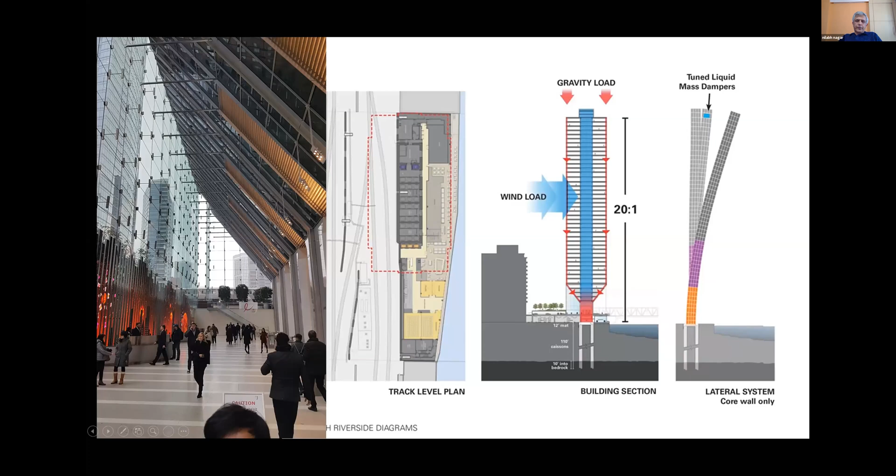What have been the learnings? Having visited almost 65 cities in the last 20-25 years that I have been traveling, one must dream and it will happen. There is nothing which you can't do. You can build escalators at the 40th floor, at the 70th floor, you can build atriums on the 20th floor or on the 40th floor, things like that.

But you must always respect the neighborhood, but you can create your own context. You must always have an attention to detail. You must have a clear circulation and segregation. And you should always create an awe and wonder. Spatial volumes are very important at public spaces. The height, the volume, the space, the width is very, very critical. Impeccable finishes is something which I've learned over all the time that we have built and we have seen.

The other thing which we must always remember is to create a robust program. It doesn't always have to be an office building. It doesn't always have to be a residential building. There has to be an element wherein you must be able to program the building in such a way that it stays in the long term.

So what are the key points for high-rise? The most important is the purpose and context. What is it that you're building it for? Then there is geometry and proportion, because after all, any high-rise requires structure, and it requires it to be stable and do the purpose it's meant for.

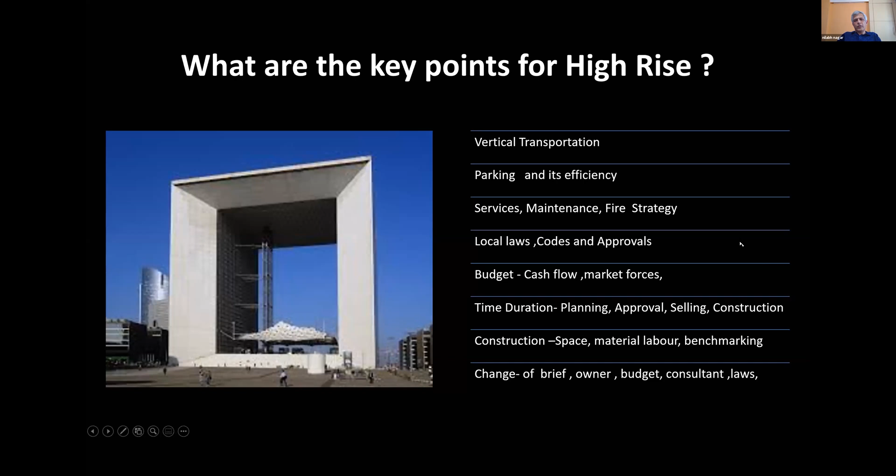Construction: there is always a space limitation in Bombay, or the material, labor, and of course there's the idea of benchmarking, samples and sample apartments and everything else which comes into that. And the scariest part of this whole high-rise building is the change. The change of brief, sometimes ownerships change, budgets change, consultants change, laws change. And it's something which we have to deal with every day, and we have to react to it as we go along. Now let me share with you some of the projects, and we'll discuss some of these points which I have said.

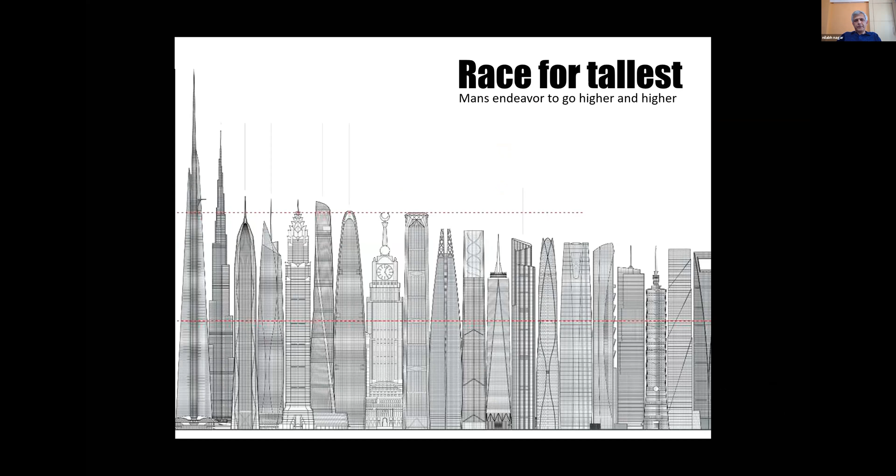In the world, there has always been a race for the tallest. This is man's endeavor to go higher and higher. And we, as one of the leading architecture firms in the country, are not far behind. We have also dreamt and we have built. It started with the Tower of Babel. Then we had the more iconic Empire State Building. Then we had the Sears Tower, the Petronas Towers, the Taipei Tower, and finally the Burj. And now I believe there are further towers coming up which are taller than this. Calatrava is building one which is taller. There's one more happening in Saudi which is taller. And there are equally tall buildings already planned in 2019, and I believe coming up in 2021 as well.

So in our journey for tall, we built the Imperial 1 and 2, which is 255 meters. Then we built the 23 Marina at Dubai, which is 400 meters. And then we were also planning the India Tower, which is 515 meters, in the Chowpatty area. The work started, they dug below. They had a 9-meter raft already dug. And then of course the project stopped because of the recession and everything else.

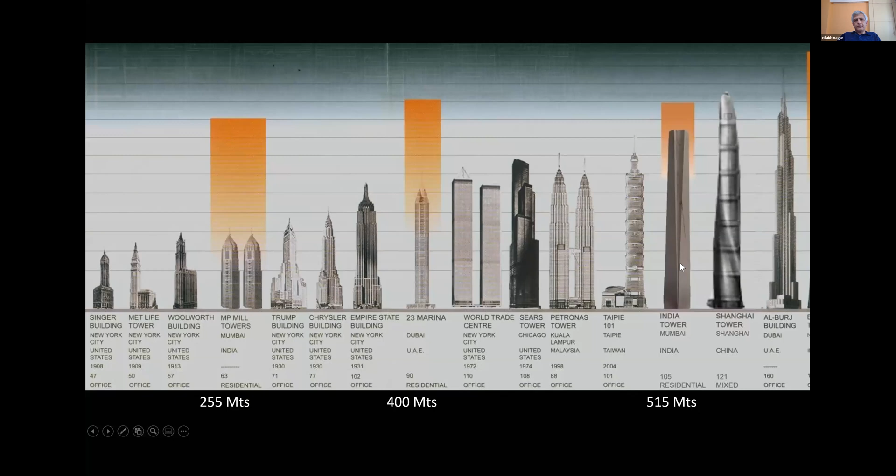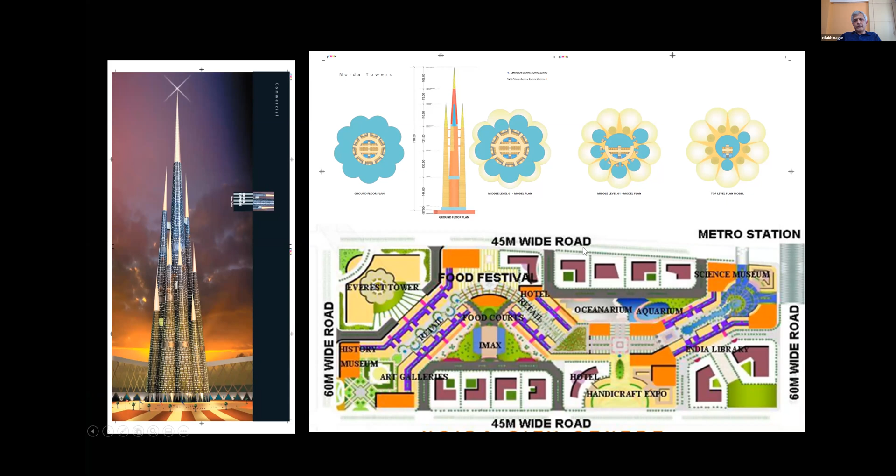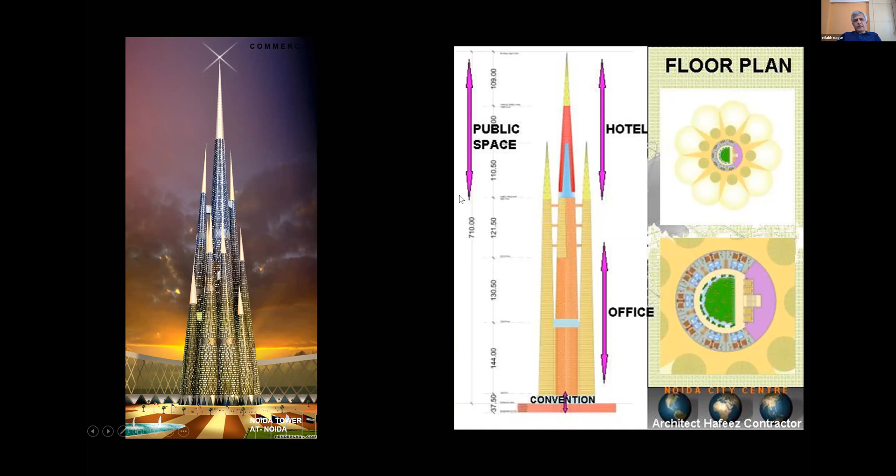But meanwhile, while we were planning this, we had an opportunity from the government of Uttar Pradesh, where Mayawati asked us to plan the tallest building in Noida. So they gave us a plot in Sector 32, Noida. This was one of our schemes which we quickly came up with, called Everest Tower at that time. The idea was to have one of the tallest, of course. At that time, we were trying to beat the Burj, which was at 560 meters. So we designed this building at 710 meters height. And we created a Mall of India below that, over 32 acres of site, with office buildings, residential, hotels, and mixed use on the top, super apartments and everything else. So this was one of those quick exercises to pamper the ego of the state at that time.

So we now come down to what we have actually built: the 23 Marina at Dubai. This, for a short period of time, for a year or so, was one of the tallest residential buildings in the world, being a pure residential building. Then of course we got beaten by an adjoining neighbor in Dubai itself, and subsequently in other parts of the world. While it lasted, it also came in the I Love Dubai official postcards of Dubai Tourism, because at that point of time, it was the tallest residential building in the world.

This building is part of the Marina complex, which is a kind of mixed use complex where they have towers along the artificial marina that they have created. And our site was on the rightmost corner, facing the Palm Jumeirah and things like that. This was the site, this was the view when we first came into the site.

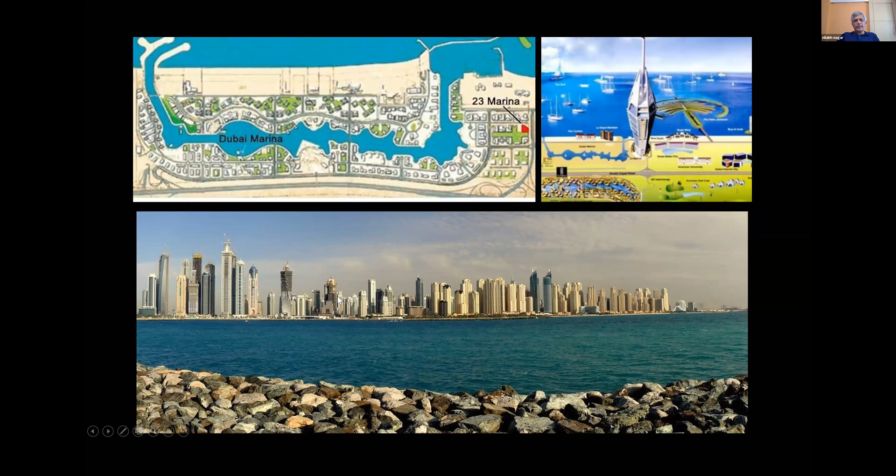And these are some of the first sketches that Hafeez drew. He loves to draw on newspaper simply because some of those ideas do come on the plane when it's the quietest. And then it gets followed up by sketches once he is in office and discussions with the clients and that passionate person.

And then this was the first time that we were building higher than 60, 70 floors. So we had international consultants, Mr. Joe Colaco, who came in from Texas, and he advised us on the way the structure was to be done, the way the structure behaved in a tall building like this.

And then there were the local laws of Dubai, which required a certain amount of parking. The zoning criteria defined that the building had to build right till the edge of the plot, because there is a parking bay at the back. That's how the whole structure of Marina is an urban design defined complex space.

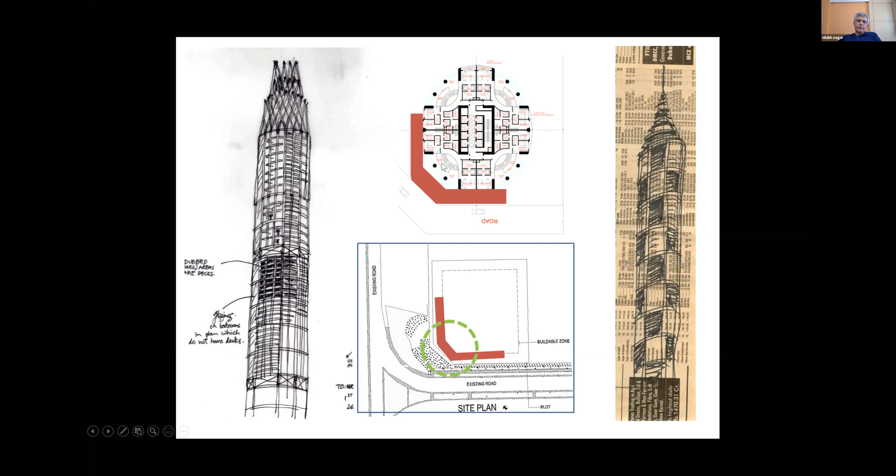So let's run through the floor plans of this building. This building is divided primarily into 3 zones with 2 service floors, which of course have the outriggers also. Up to the 8th floor, the podium is all the public space. So you've got the club, the entrance lobby, the services, the parking. All of that happened till the first 8 floors. And subsequently, we have a large triple height public club space above the podium.

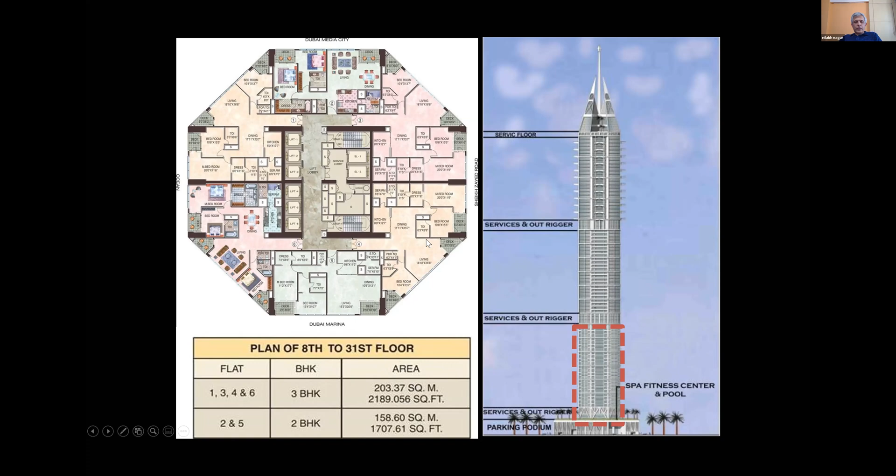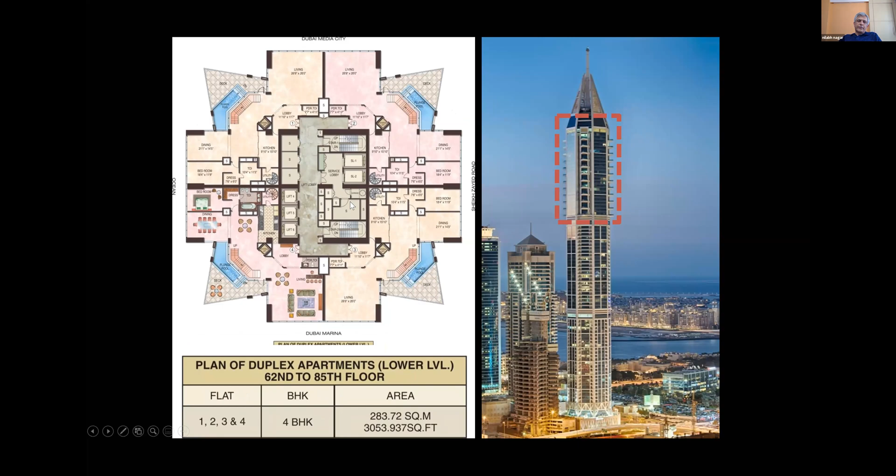And then we have the 3 zones that I spoke about. One has 6 flats a floor from the 8th to 31st. Then we have 35th to 58th floor, which is 4 flats a floor. And then they have some terraces coming in. And then on the top, we have the duplex apartments, which have their own individual private lifts with corner decks. There are double height lobbies in every duplex apartment. So overall, about 350 apartments.

Hold on a minute, there's a slight change in the...

In the Bombay Dyeing Mills, we have a mixed use development, which has 3 towers of residential, 1 tower of office, 1 tower of hotel, and all of it is combined with ground level retail happening down below.

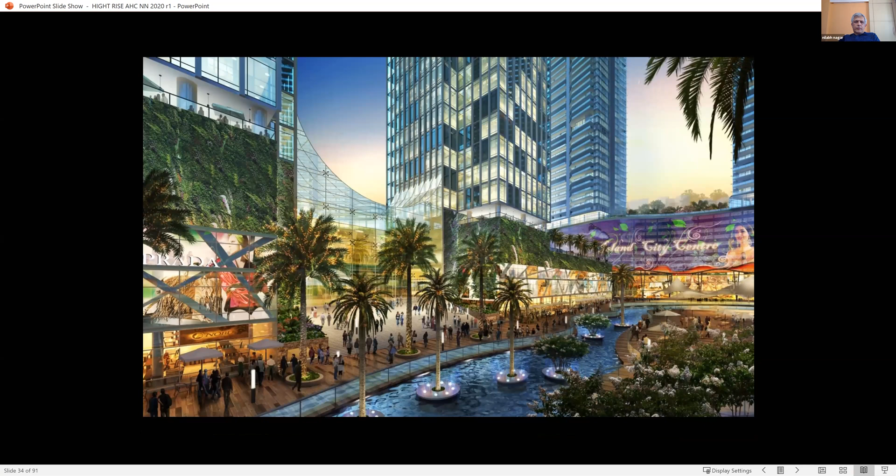Yeah. So what I was trying to explain was that when this planning was happening, some of the critical parts that I wanted to share with all of you was the fact that given the same footprint area of a building, and the client's requirement for certain types of apartments, the proportion of 3 bedrooms, 4 bedrooms, 2 bedrooms, initially we had come up with plans which are linear shapes, which gave us a much better elevation and shape and form.

But when it comes down to efficiency of floor plate to core area, efficiency of parking, efficiency of the structure itself, we realized that a geometrically straight square building is the best option in terms of structural efficiency. Because of the geometry, we could bring down the consumption of steel. The slenderness ratios of the building improved considerably, the efficiency of the structure improved, and we could make the building in a much more economical way.

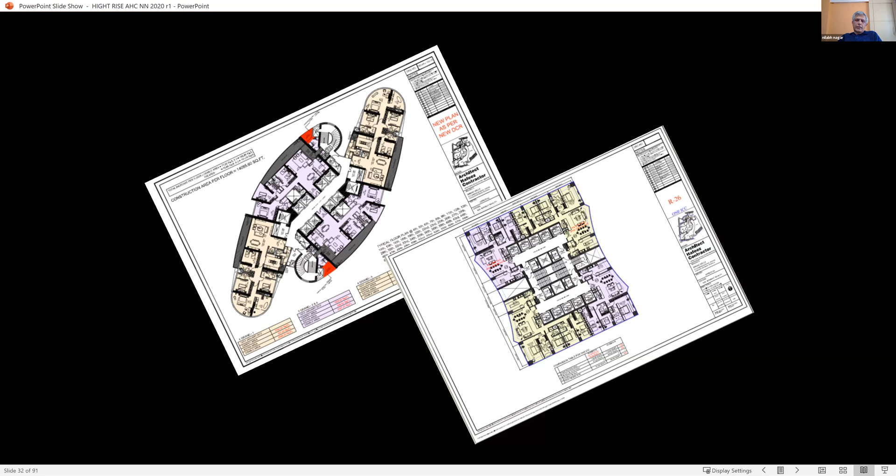The next I want to show you is the Imperial 1 and 2, which again became the tallest building in India for quite some time. And now we have higher buildings in Bombay itself and in Calcutta also.

This I will explain to you in a different manner, in the sense that this also served a larger social issue, which is slum rehabilitation, an important aspect because in Bombay more than 40% of people live in slums, probably more. I really don't have the real figures, but this particular project was a long time in the making. It took us quite some time.

First, when we were at the site, it was full of slums. This part of the project is on the hill slope. This part is on almost flattish ground, and the entire thing from here all the way up was completely full of slums. So this way I find that the high rise itself has an ability to overcome a social, or let's say a crowding issue of the slums.

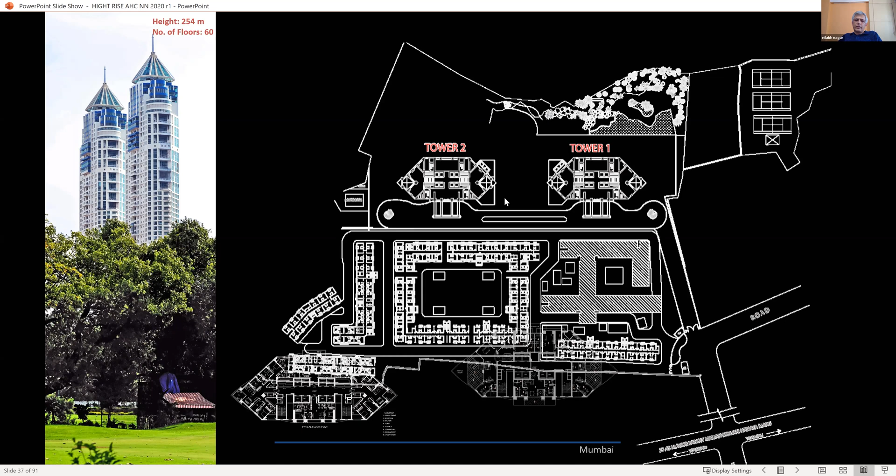This has also got about 6 flats a floor, and on the top it becomes a duplex, and then the topmost floor is a triplex for the owners. So we got a set of 8 lifts, 2 zones running. I think the speed of the lift was 4 meters per second.

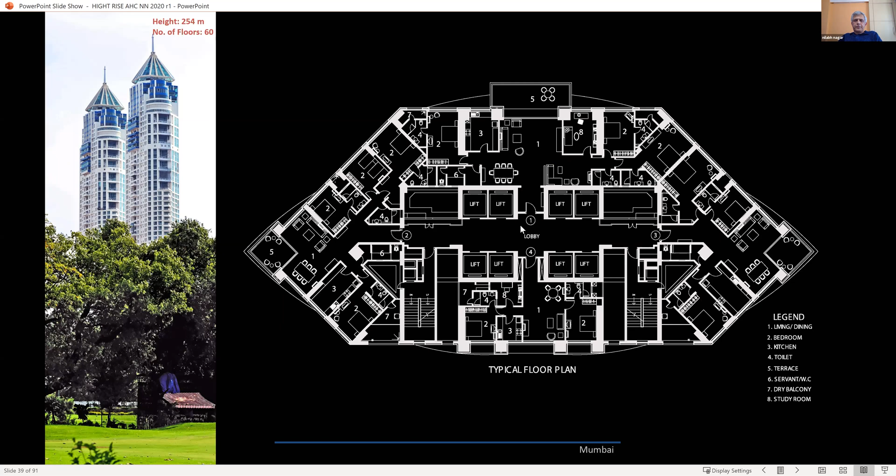So this is what I was explaining to you. This is how it was when it first came in, 2,500 slum units, all across and going all the way up the hill. And over a period of time, we made the rehab buildings, and then we started the towers.

The other thing you must understand about these towers is that this required that a fire tender has to go right up till the top of the 9-floor podium. So then you had to have a kind of a double height driveway which went all the way here, then it came up, then again a double height driveway which went all the way up. So at any given point of time, you had a 6-meter driveway going right till the top of the podium.

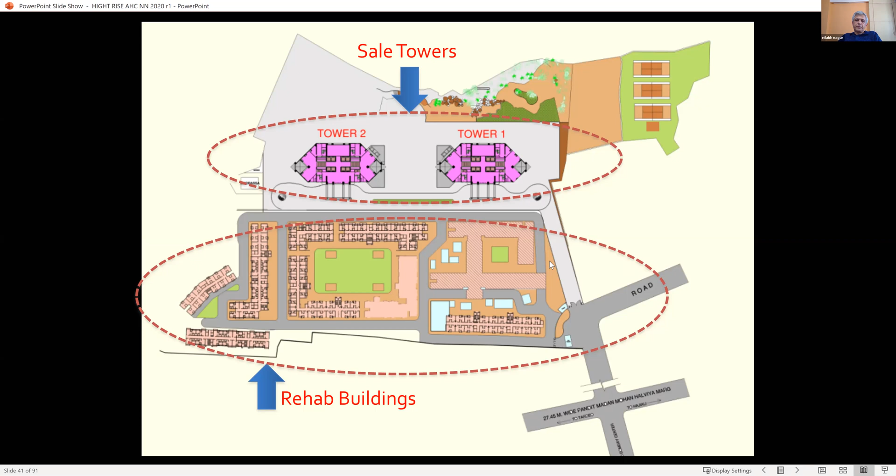This is how it was. We built the first set of buildings, then we started the tower at the same time. And then we built these 2 towers on the top. So you can see the slum rehabilitation buildings here. You can see the podium, 9 floors of podium here. And then you have these towers coming on the top. This is the Ambani residence.

Here the external cladding we have used is aluminum composite panels, and we had, of course, initial challenges. The wind forces were quite high. Both the building as well as the curtain wall were tested in wind tunnel testing, and we realized that this building, considering its geometry and everything else, had very high performance requirements. This was done by a Swiss company, Schmidlin, at that time.

The railings had to be designed for that kind of a wind force. Railing heights had to be decided based on the wind. And so were the sliding window systems and everything else that came along with it.

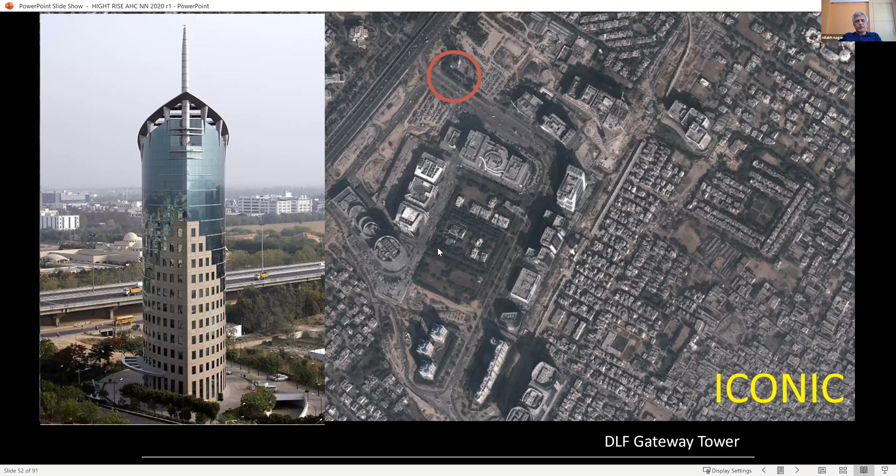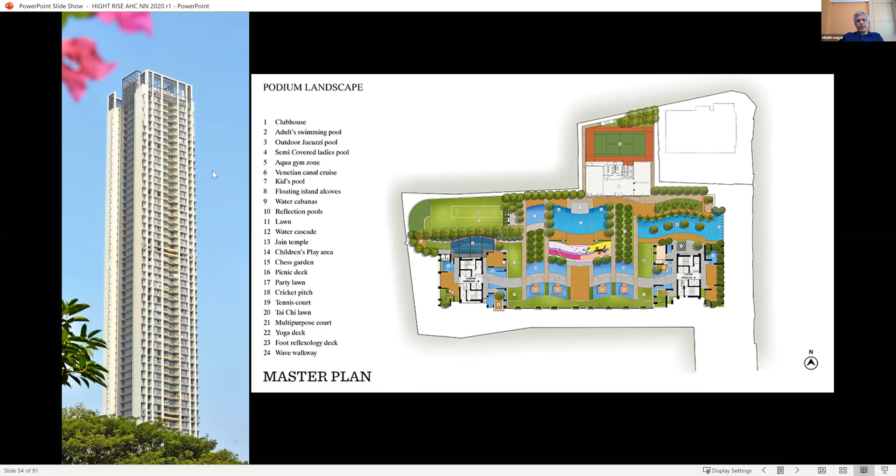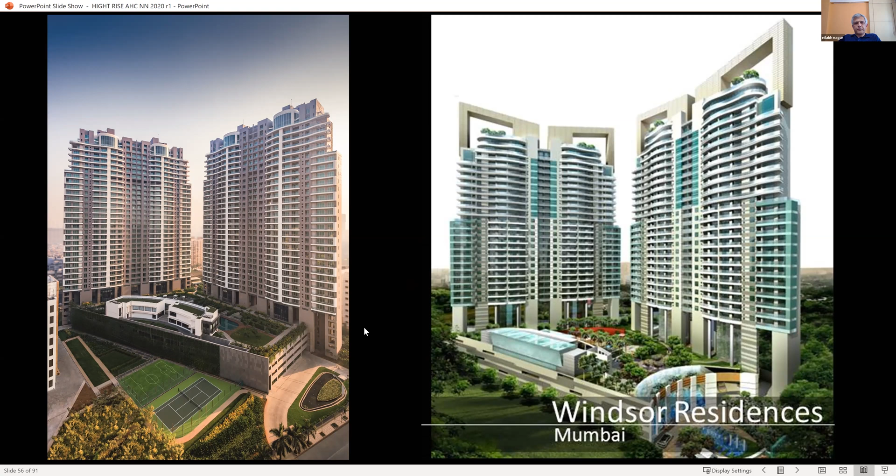So that went off. And here also you can see the second aspect, especially for people outside Bombay, is the fact that we have 3 levels of car parking. And then we always make sure that we have a triple height lobby at the level at which you come out into the main garden. So lobby heights have always been our hallmark, or something which you must make sure of, because that's what gives you the first impression, both when you're entering the building and when you're exiting the building. This is a triple height lobby.

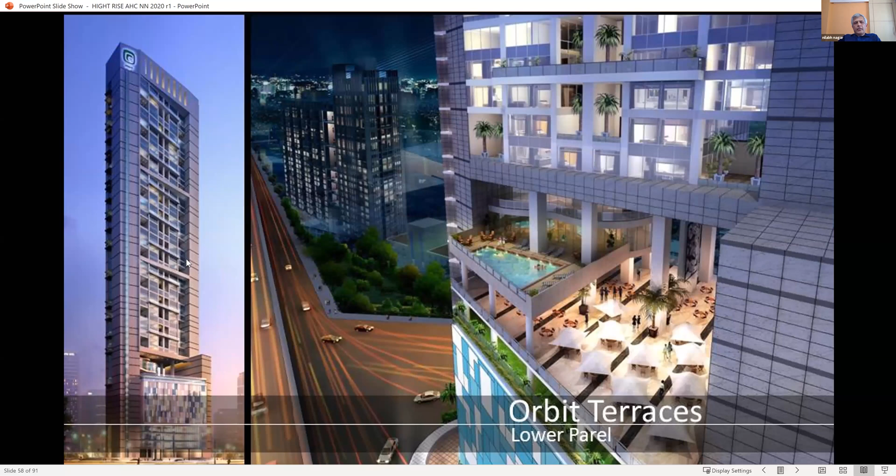I was trying to show you this project because this building was originally conceived as an office building. And then subsequently, the office building market wasn't so good. So we had to convert this building into a residential building. I think the building had come up to about 1/3 the height, and then subsequently it was completed with residential floors. That created large gardens at the terrace level of the parking floors. This has got a mechanical car lift system.

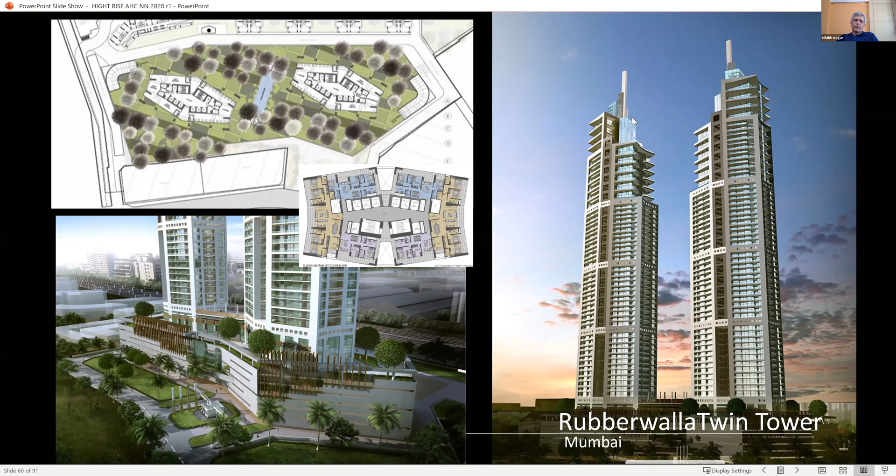This is a project which is underway right now at Sewri, very close to the Bombay Port Trust. It has got excellent views to the eastern waterfront. And this is also one of the slum rehabilitation schemes where you can see those rehabilitation buildings at the back, and the sale towers will come up in the front. 9 levels of parking and 52 levels after this. Again, the structure: there is a strong core, there are perimeter columns, and then you will have outriggers at every 3 levels, which will connect the inner core to the outer skin. And then on the upper levels, we created duplexes on one side of the tower. And then really on the top, there were a couple of triplexes as well.

This is also a project which is currently on hold, but very much going through this process of approvals. It starts off like 6 flats a floor, then goes on to become 4 flats, then becomes a duplex, then becomes a triplex.

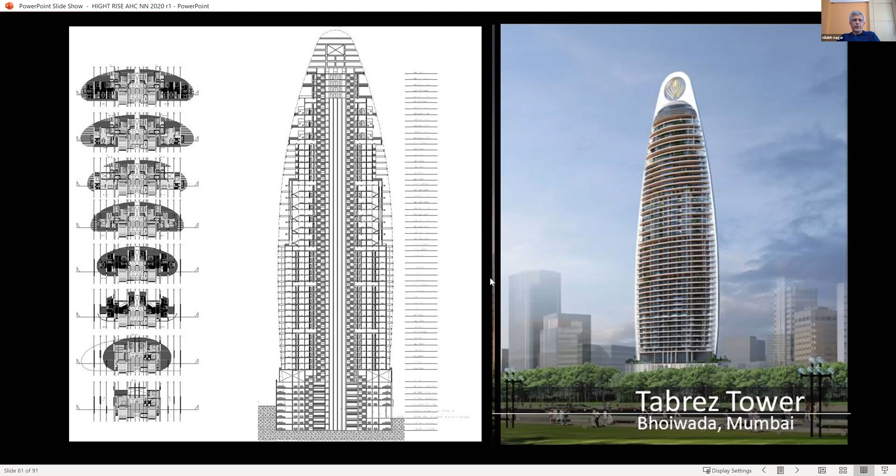This project is almost nearing completion. This is next to the race course in Bombay. One of the greatest challenges that this project has had was the time duration. This is also a slum redevelopment project. After a builder has already built and spent money on the slum redevelopment, he starts off on making the tower, and then the sales kind of diminish and the laws change.

So what happened was that till this level, till kind of, I think the 30th level, it followed the old plan, and then the laws changed wherein they didn't allow these decks on the outside to be free of FSI, and all had to be enclosed. Everything with the decks which used to get free of FSI were not there anymore. So one had to include that into the building and then change the building floor plan subsequent to that on the top. So you can see the building which is curved down below and it's become straight on the top.

This is something which is a reality here in Bombay. We had to face a fair amount of this change of laws in the last 4 years that has caused its own disruption, and we had to react fast to ensure that the project doesn't stall, neither the developer faces any issues on that.

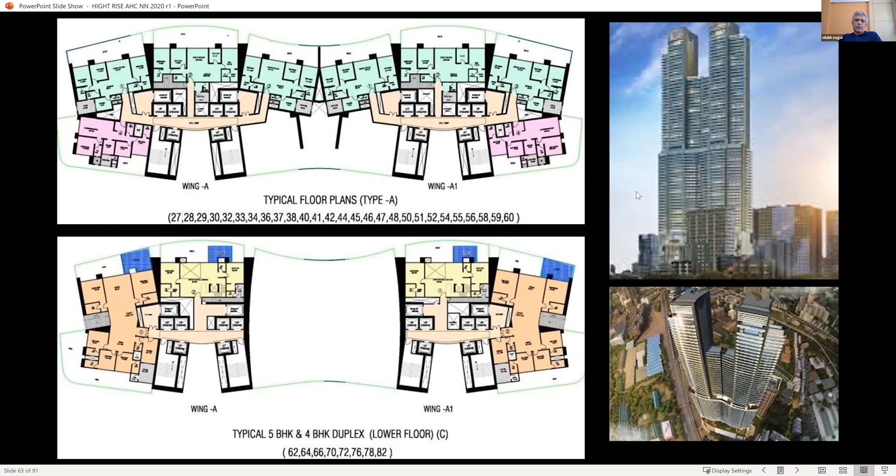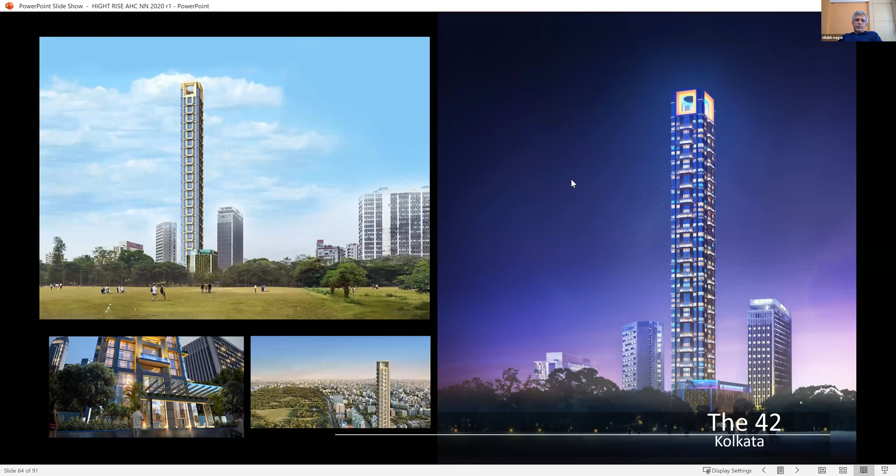This is a project in Calcutta, the 42. It's facing the Maidan. Those of you in Calcutta are familiar with it. This was the original concept that we built. It's got 1 flat a floor. This was having a slightly different structural system. They had the outriggers, but they also had to have a concept called belt wall, which means that besides the outrigger, which connects the core to the outer perimeter column, there is a shear wall kind of a concept which envelops the outer column at two locations, which reinforces the whole building because of its slenderness factor. This is one of the high-end apartments, one flat a floor.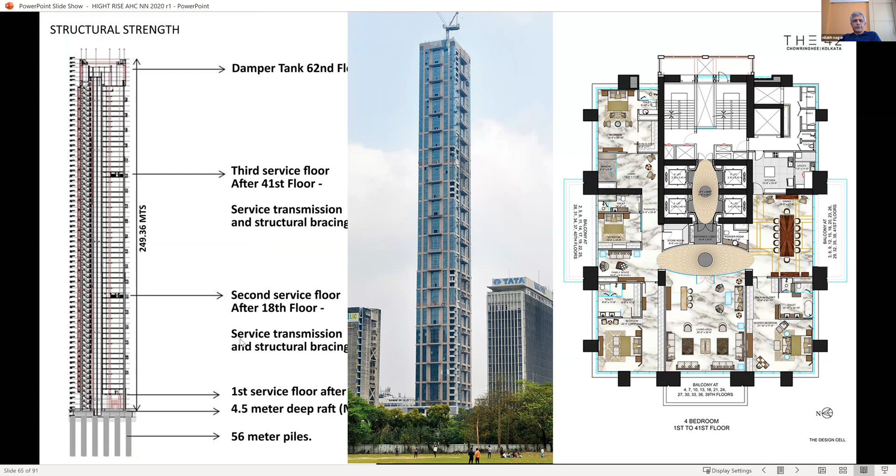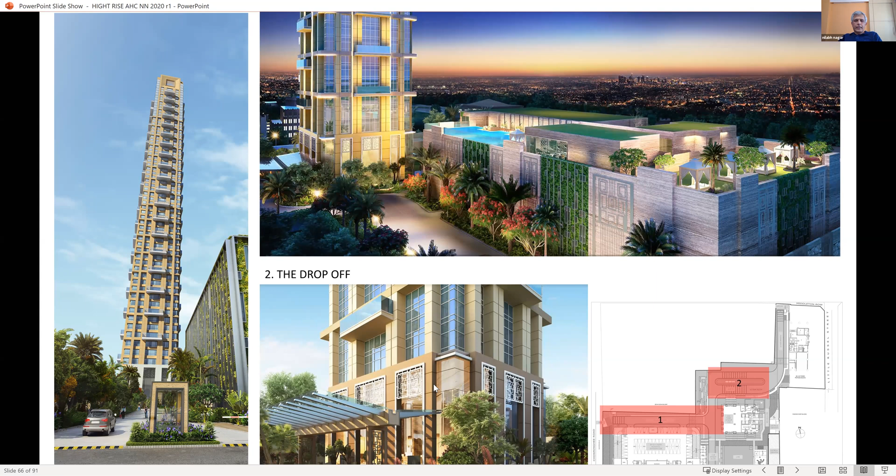Here, unlike other buildings, the building started right from the ground level. I'll just go back here. This building starts right from the ground level. Unlike other buildings where you had a podium up to say 6 levels or 9 levels in different cases, here the building starts right from the ground level, and the parking and every other requirement is made in an adjacent building. So you got this parking building and a club on top of it, and this building starts from the ground floor itself. Like all our other buildings, this has got an entrance lobby of 10 meters high, and then we have a service floor, and then the apartments start after that.

This is one of the buildings which we are doing in Noida, where we have used the terrace garden, connected it on the top, and one of the tight sites where we hardly had any ground space at all, because this was part of a larger complex, and this developer had purchased this strip of land from another developer and wanted to build an iconic building here. So we made this. These are all 3-bedroom, 4-bedroom apartments, which we connected on the top and at mid-level, which has got some of the duplex happening here. And then on the top, we have this entire terrace gardens, which we have planned. This is the second project that we're building for this developer.

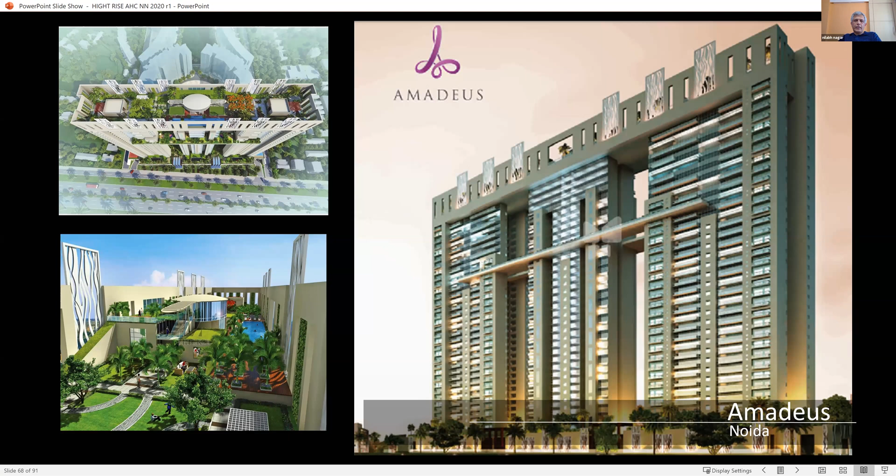We already built one for him called Meghdutam, which is this one, which is one of those first buildings in Noida or North India where we created a nice 10-meter high stilts, so that the entire ground space was completely free from any flats or anything except the entrance lobby. Only one ground floor flat was kept here on this corner, which was a particular requirement of a very specific friend of theirs, and he was willing to pay a good price for having a corner for himself. Except that, the rest of the area is completely free.

So you can imagine, for a small site with a 9-meter high stilt, you could in fact have this entire ground to yourself. In the same building, we also created the top floor, connected all the towers on the top, and made an infinity pool. You can see this view and the entire city from there. And then we created a small kids pool at the lower level. So this is like a 2-level clubhouse on the top of the building.

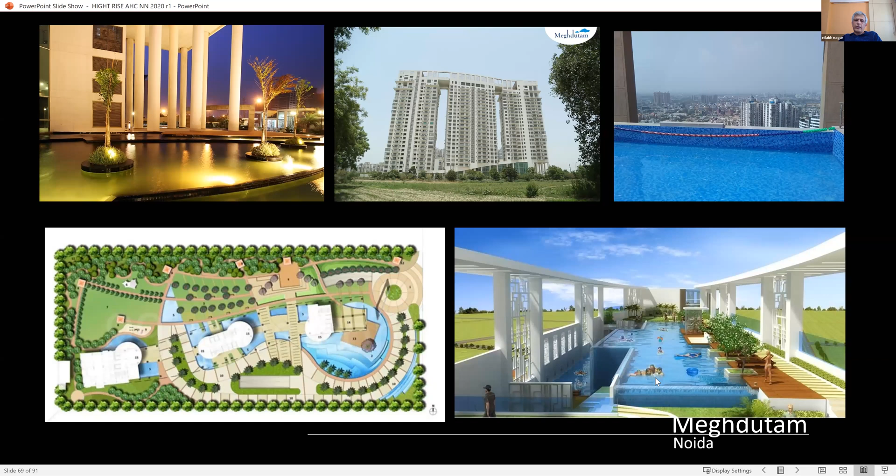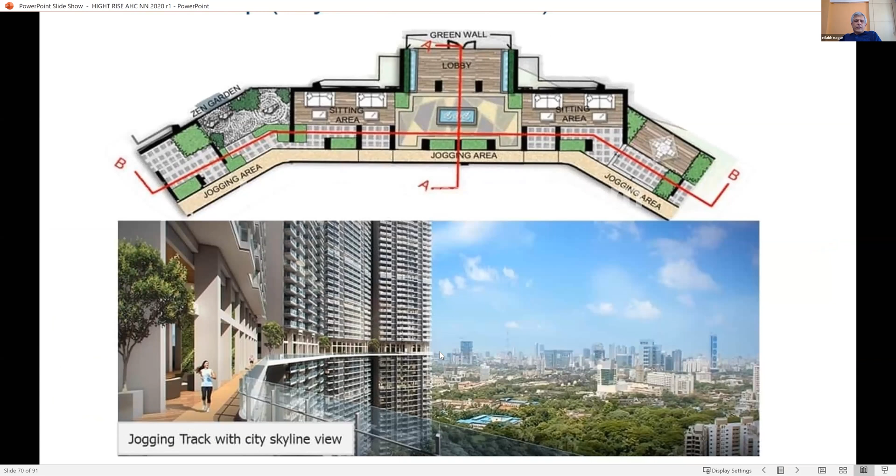Similar ideas have been explored at another project in Bombay. This is not ours, but this architect has created a mid-level on the 23rd level or something. He has created a sky deck for people to come up. When you're coming up and down a 50-floor building, I think this kind of an architecture or a relief at the middle is a great idea.

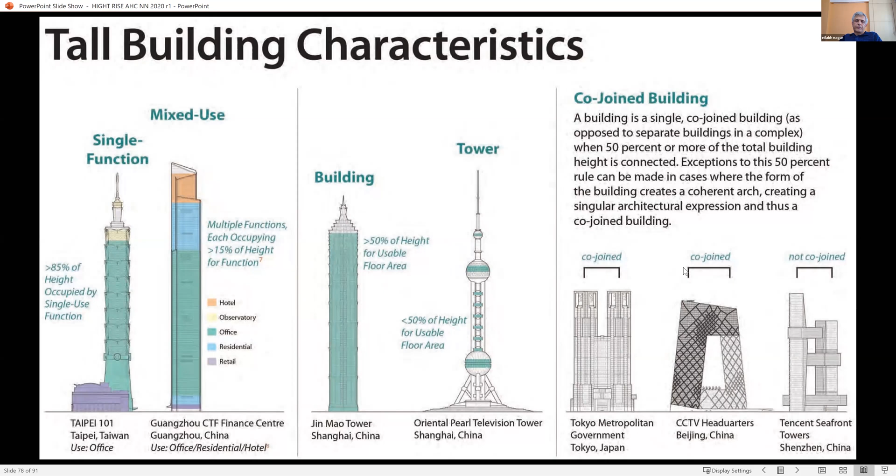What is interesting is that they now have criteria for buildings which are joined. Earlier they didn't accept this, but now they are accepting it. And this is now becoming a trend as well, wherein you have towers and then they start joining them on the top because it gives them a kind of space at the terrace level itself. They have definitions for tall, super tall, and mega tall. So far in India, I think we've reached up to 250 to 280 meters. We have dreamt of 400 meters plus. It's still not happened.

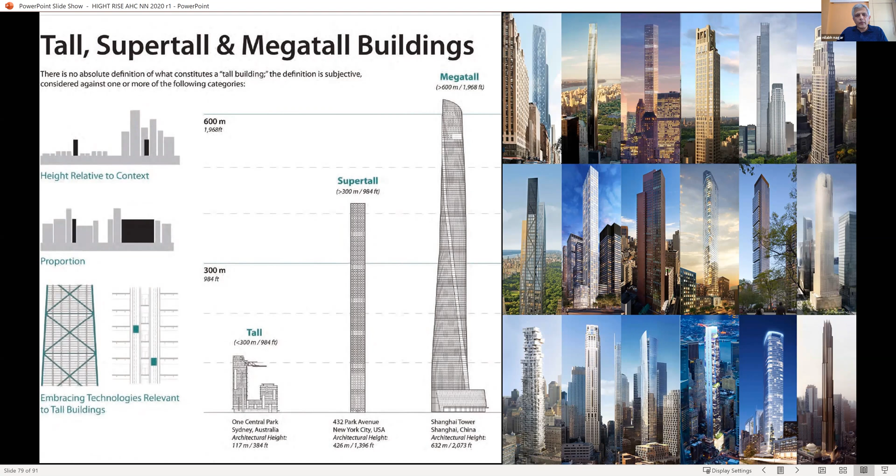Then there is this concept of tall. Then there's this concept of super tall, which you've seen, where New York is primarily leading the race. And there is mega tall, which is 600 meters plus, and I think there are about 4 buildings in the world currently in that. These are the latest buildings out of 2019. We have Soho. This is the Zaha Hadid building, which has one of the highest atriums in the world. We have other buildings out of China and one building out of New York, which are now in the top tallest buildings built over the last 2 years.

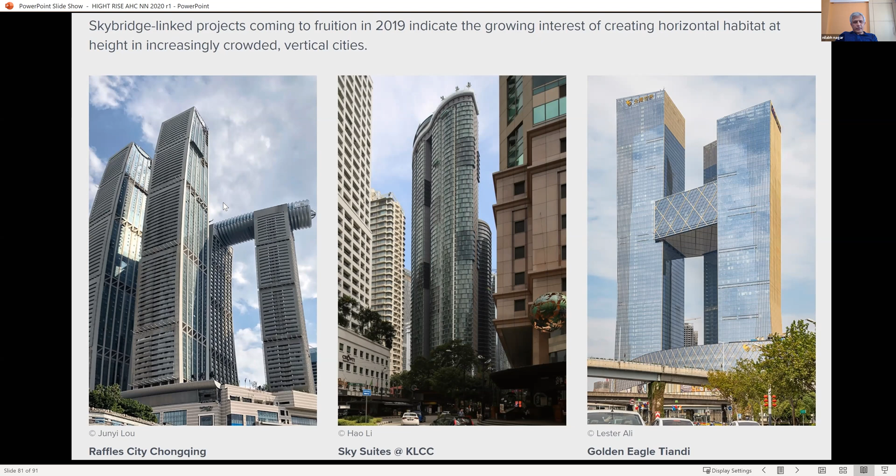This is what they're predicting are the current trends. This is by Moshe Safdie in Chongqing, where it is connected, and you must see this building. It's got some fantastic, it's at the very tip of the city, and they are surrounded by water on